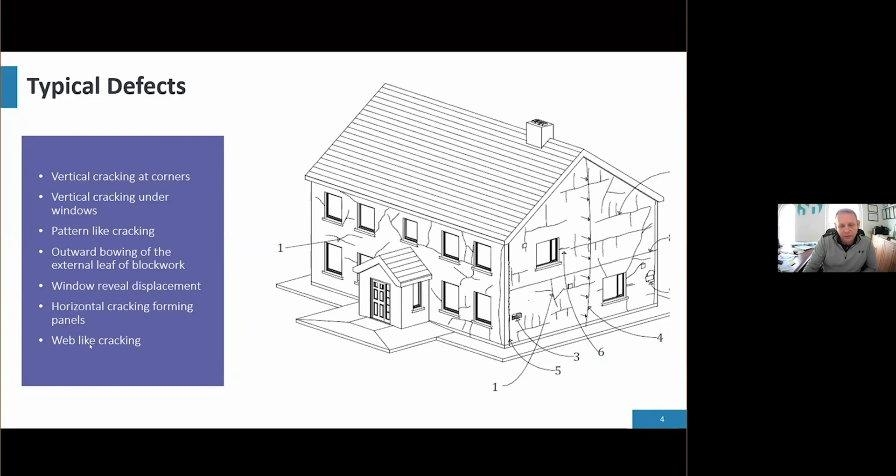Displacement around the window and door reveals - that's another common element of damage. Horizontal cracking forming panels, so we end up with these grids or panels, particularly on gable walls but not necessarily always. And web-like cracking, which is essentially spider's web type cracking.

I've put up a couple of photographs to show samples of things we've seen. These aren't always the worst, and they're not always the most significant. Obviously, the extent of deterioration is only a point in time.

These larger cracks you're looking at here on corners weren't always that wide. There's a progression of cracking throughout time, particularly with more exposure to the elements. So on all three examples, you can see the corner cracking and the movement vertically.

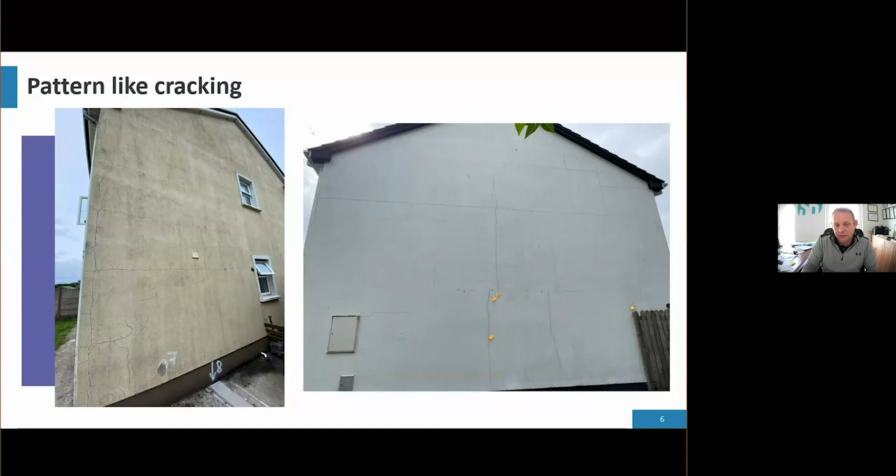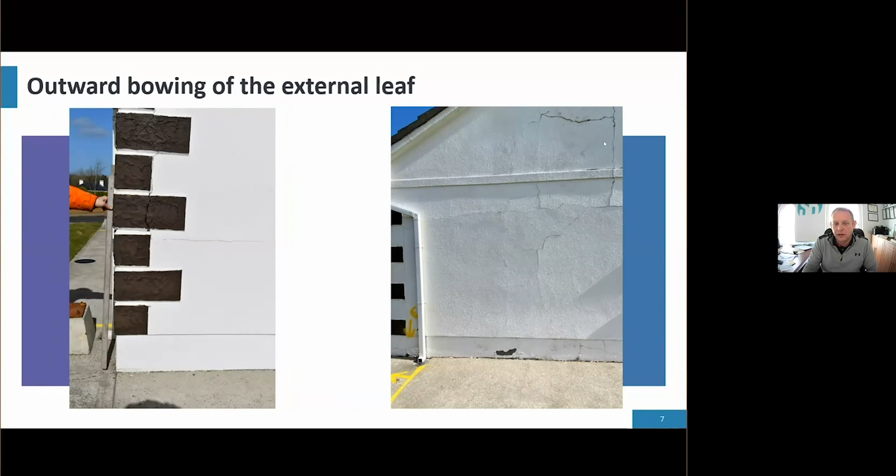The one on the right is more evident from the shadows. You can see the bowing, particularly along this horizontal line here and the vertical line. Again, not all homes will show all of these.

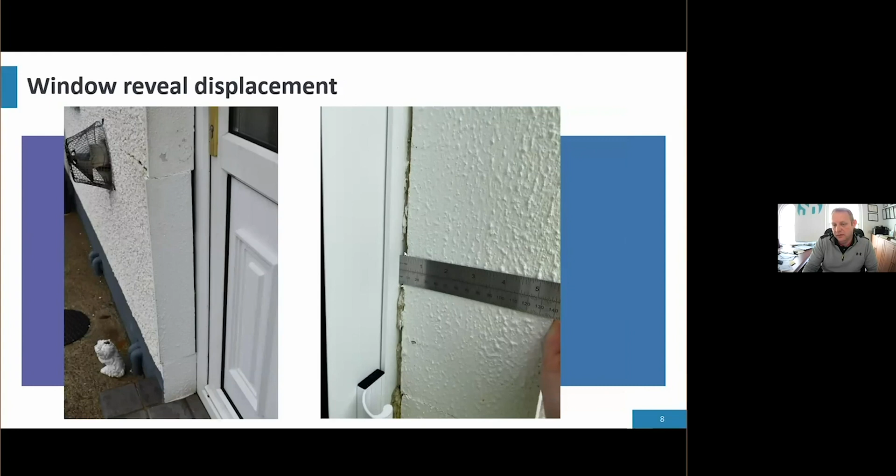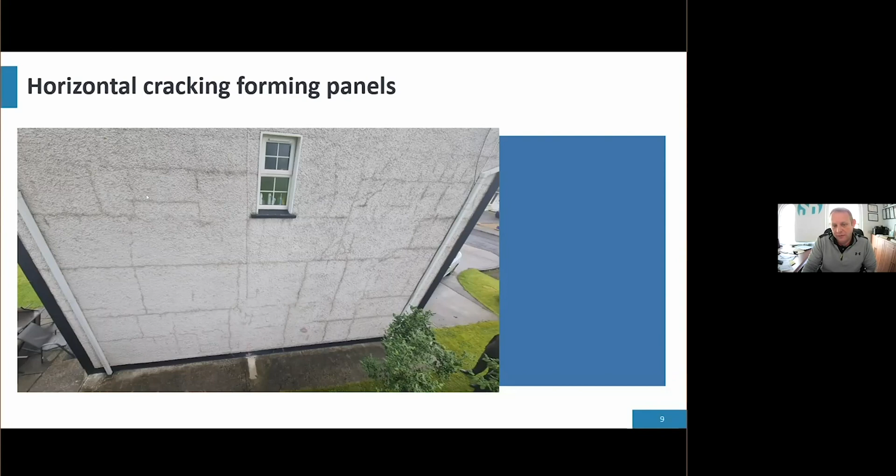These cracks are not marked with anything - this is just rain and moisture lying in the cracks. But I think you'll agree it's quite evident that there's pattern cracking on the gable of that dwelling.

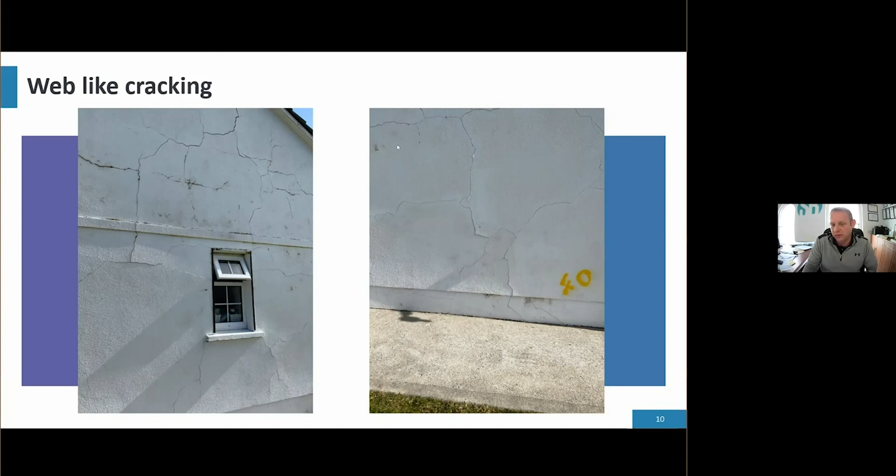Having reviewed a number of houses in Mayo, when we were asked by Martina and members of the Clare Action Group to inspect a few houses in Clare, we did so, and have subsequently done a few more for Clare County Council. I just wanted to show some of the similarities in images, and then we'll talk about similarities in other aspects.

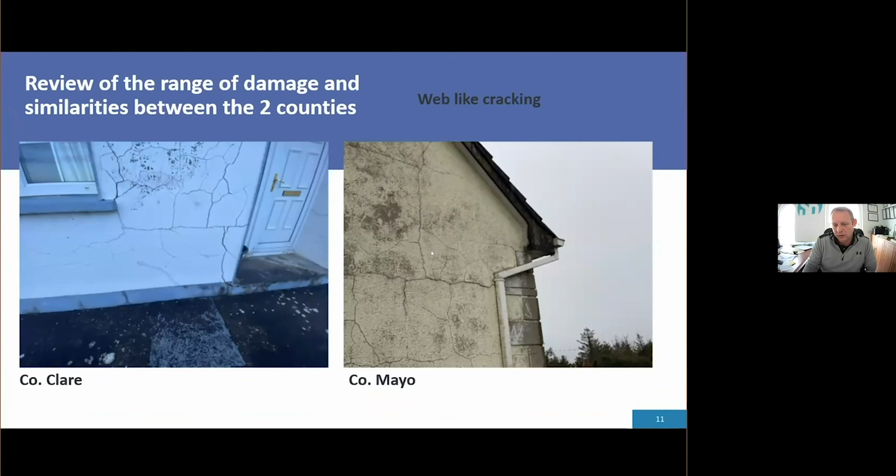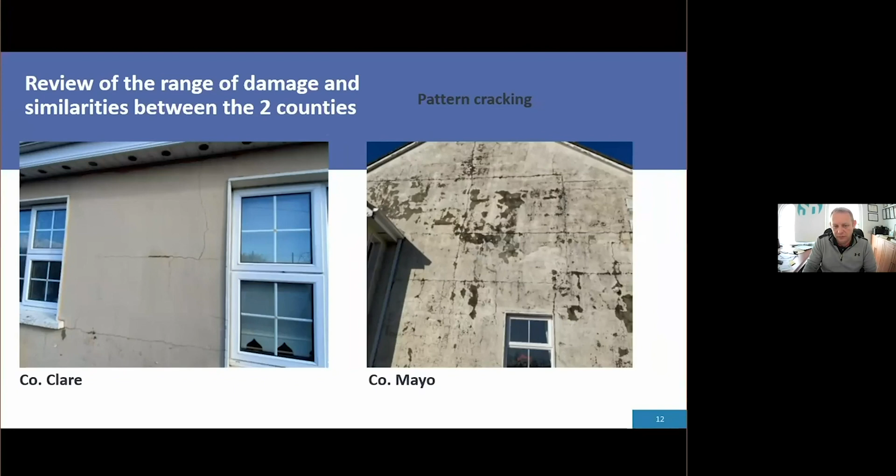Web-like cracking, you can see house in Clare, house in Mayo, very, very similar. Pattern cracking again - it's a very common thread that as damage increases to the property, the cracks become more and more alike. Vertical cracking here on the corners, one in Clare, one in Mayo, particularly bad in this one in Clare.

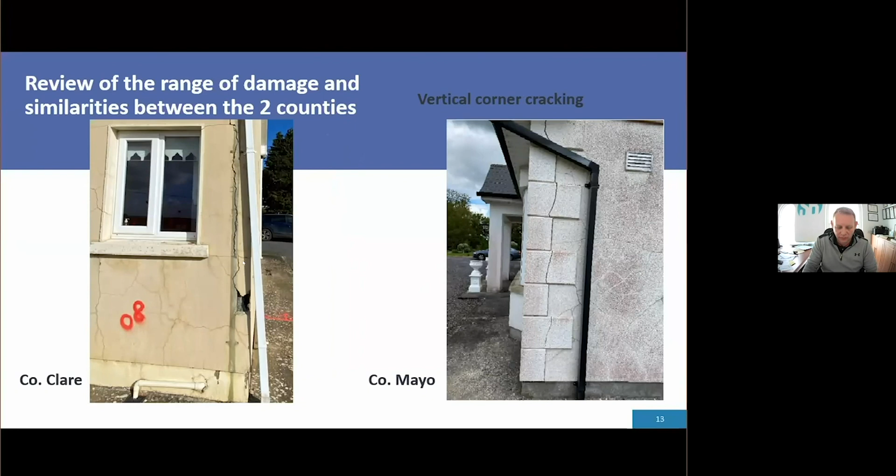Having tested in both counties, with Petrolab's help, I've extracted a couple of paragraphs from reports that came from the laboratories comparing both. One says the samples from County Clare are composed of the same, very similar fossiliferous and potentially pyritiferous black limestone as the samples from County Mayo. We didn't notice any noticeable differences between these samples during preliminary macroscopic observations.

Another paragraph from one of the geologists - I went through all of these reports, and it looks like the material used for concrete in both counties was similar. The aggregate appears to be the same. There were a few reports with additional fine aggregate, for example beach sand, but there was no major difference in reports from both County Mayo and County Clare.

So the physical evidence from both counties is similar, and the geological evidence is similar. The question then arises - why are both not on the defective blockwork scheme? That's what the people of Clare are looking to achieve. The people of Mayo are luckily on that, along with Donegal, although some would have plenty of issues with the scheme in its current form. That's what we've been assisting Clare County Council to achieve.

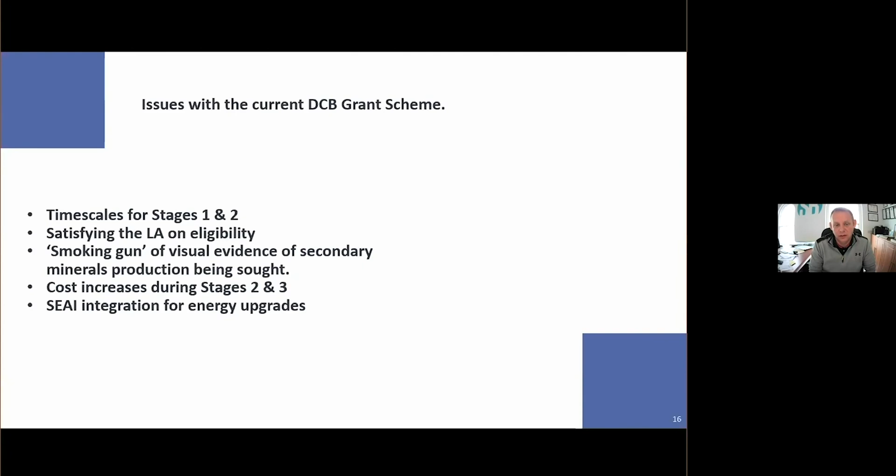We probably have 20 houses nearing completion at the minute that haven't really had any assistance from SEAI, which we would like to see going forward, because I think it's a great opportunity for people to integrate energy upgrades into their dwellings, particularly if it's a complete blockwork removal through demolition.

I suppose the new scheme is a bit speculative at the minute, so I just want to note that. I think the building condition report that will be completed by engineers like myself and Aidan is going to prove difficult, because I could name 10 properties we've been to over the years...

...that were completely externally wrapped with insulation by homeowners trying to hide the cracks they had in their dwelling. So again, it would be difficult to produce a building condition report showing minimum damage thresholds when a photograph of the dwelling will show it in perfect condition.

So I think there's almost a penalty going forward for those who maintain and upgrade their houses better than others. And I think that's going to be an issue going forward.

And the other big issue is partial repair. I sometimes get a little bit of bad press within Mayo County Council, because all he ever recommends is option one, which is demolition.

I mean, demolition to me is the only option for pyrite, and it's not necessarily even demolition - it's removal of the defective concrete blocks, and removal of all of them down to foundation level. And often the simplest way to do that is via demolition.

I know my office will not be certifying any remedial works that don't include removal of all the blocks going forward in relation to pyrite, because I don't feel we're in a position to do so, and I don't feel our insurers will be in a position to do so. That's the stance we're going to take, and we'll see what indemnity the department will provide going forward.

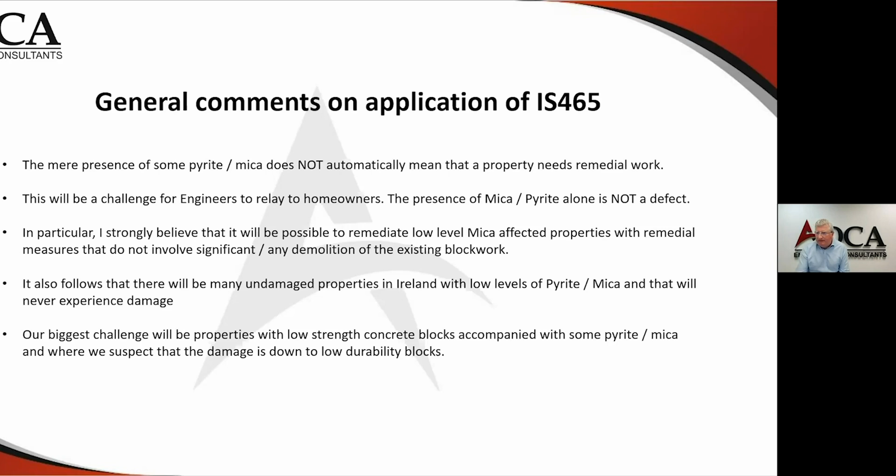Greatest challenges for engineers going forward: the expected approval process looks like a submission to the Pyrite Resolution Board of the Housing Agency. Currently, building condition assessments are sent to the local authority, but they don't have the expertise or resources to review all the cases. In my opinion, this requires a centrally managed hub with input from the local authority as necessary. I understand it will be the housing agency that directs the remedial solution and then requires the homeowner's engineer to adopt that solution as their own.

This is a huge problem, in my opinion, for engineers, and I've reiterated this to Damien Owens of Engineers Ireland and to all parties willing to listen. It's a problem because it removes engineers from their input to an appropriate solution, and yet engineers would then be required to sign off on it.

Engineers cannot get professional indemnity insurance at an economical cost to deal with mica and pyrite works in Ireland under the current regime, and it would be impossible for any of us to get PI insurance for this type of work once the new regime is implemented.

Effectively, what's being said is that the housing agency will direct the engineer as to the solution to be adopted, and thereafter the engineer has to take ownership of that solution as if it were their own, implement it, and then sign off on it as being satisfactory. I'm sure Simon would agree that is not practical or feasible for an engineer.

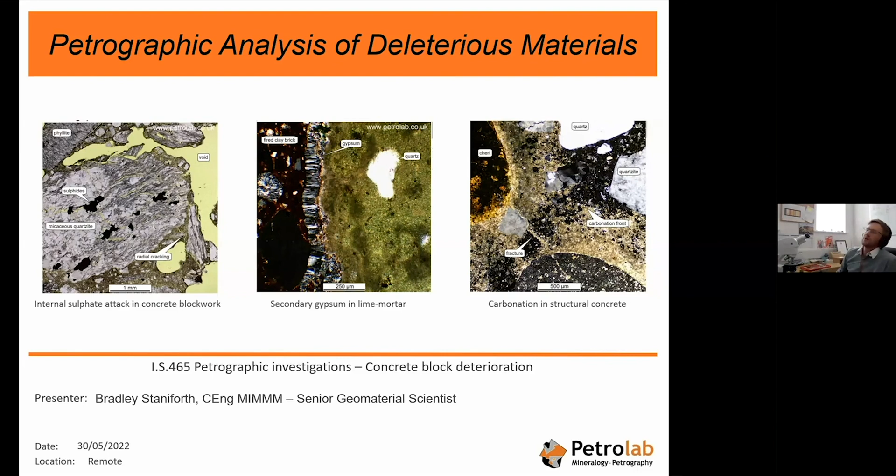So I'm going to present today on the petrographic analysis of deleterious materials, focusing on IS 465 petrographic examinations.

So briefly, what I'm going to cover during this is what is petrography and why is it a key tool to investigating deterioration, and the basic scope and format of the IS 465 testing standard, although that has been covered in pretty reasonable detail by the previous presentations. Then we're going to have a look at the IS 465 testing routes as they are progressed through the testing laboratories.

Look in detail at the test suite A, B, and C analysis we undertake at the laboratories. Have a brief look at the main deleterious components seen commonly in County Donegal and County Mayo blocks, applicable also to the other counties which are being affected by deleterious concrete blocks. And then I will talk through the IS 465 risk classifications, which we provide based on reports. And finally, there's a few limitations I'd like to point out based on the current testing standard and some suggestions for further research, which will help make our assessment of these materials faster and more accurate for the homeowners.

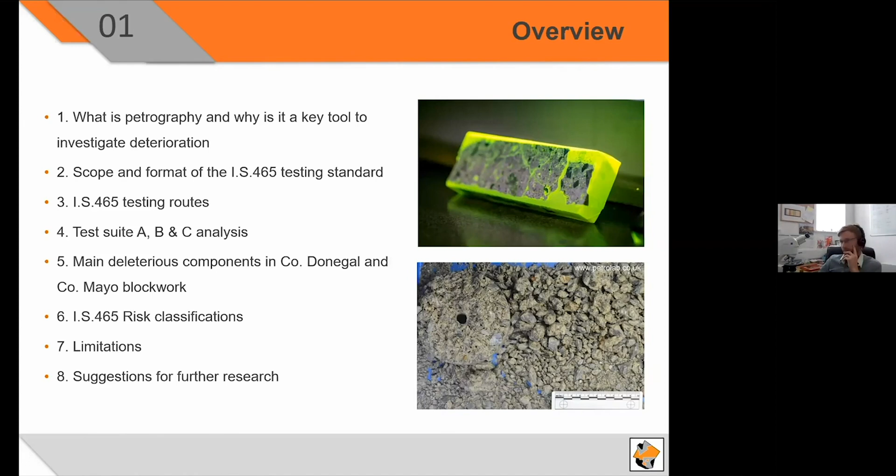Okay, so petrographic examinations involve the microscopic examination of rocks and geomaterials, describing compositions and textural relationships. Petrographic investigations are a well-established geological technique, and they can be applied to concretes and geomaterials to really bring a detailed microscopic view of what's going on in these materials and how that's affecting strength, durability on both a macroscopic and a structural scale. So these investigations are supported by a range of physical and chemical techniques and analysis.

These techniques utilize petrographic thin sections of materials, where the material is first mounted in resin, polished, mounted to glass, and then polished again to 30 microns to be examined under the petrographic microscope, an example of which is on screen currently.

Whilst primarily a microscopic technique, the real art comes in applying this to construction materials and applying those observations up the scale to the macroscopic hand specimen scale, and then using that information to further inform engineers on the structural scale. And that's how we use that to predict their future behavior.

In order for this system of observation to provide effective sound engineering judgment, it needs to utilize good sampling techniques at the macroscopic and structural scale to then pass back down and up again the conclusions in an accurate way.

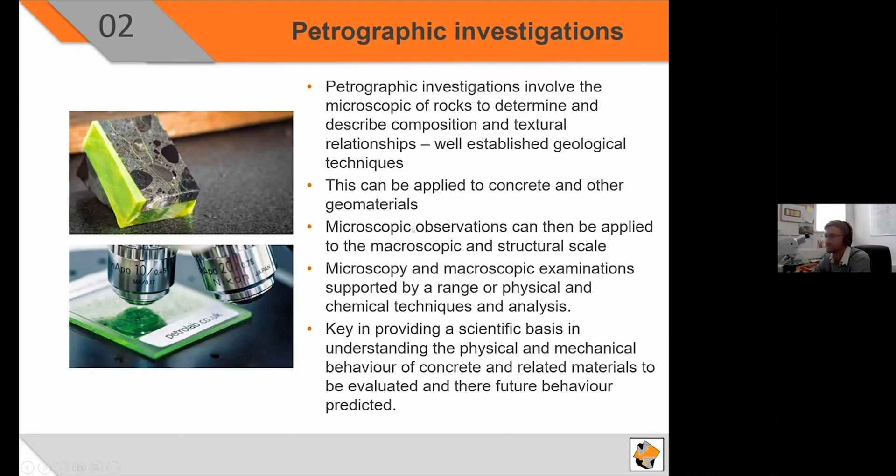Okay, so the IS 465 standard, as we've already noted, was based on the findings of the expert panel. The standard deals with the full examination, both the site and laboratory testing side of things, with the laboratory investigation to be undertaken by a professional geologist.

The examinations begin with a macroscopic examination and then proceed to more detailed examinations based on the interpretation and risk classification provided by the professional geologist and supported by the observations and suggestions of the chartered engineer, registered engineer. The standard provides a framework risk classification for both site, with groups 1 to 4 damage, and laboratory, with negligible to critical risk being assigned.

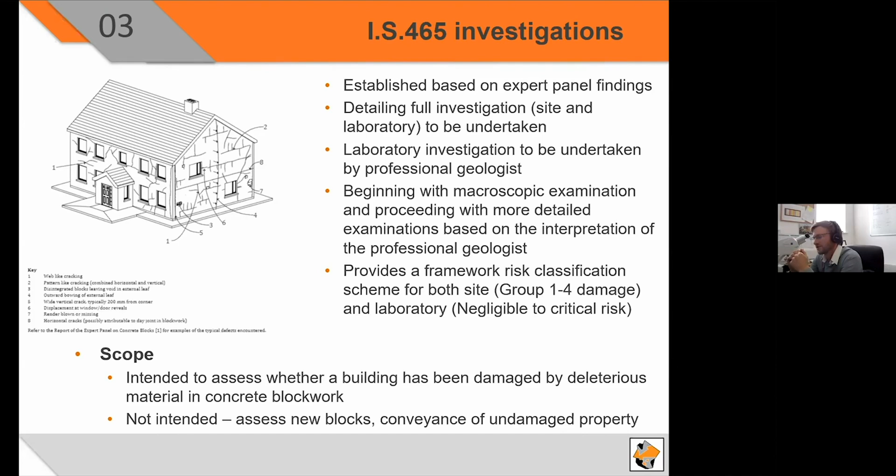A note on the scope of IS 465 is that it is intended for the investigation of properties which have been damaged by deleterious materials. It's not intended for the assessment of new blocks or the conveyancing of undamaged properties, but is being used because there are no standards which cover these applications at current.

The initial place we start with this kind of investigation is test suite A, which is a macroscopic examination of received samples. Once received at our laboratory, samples are analysed by our professional geologists to determine the aggregate types present within the block. If there are multiple aggregate types, concretes can be split into multiple concrete types to make up a representative view of the blockwork present within the dwelling.

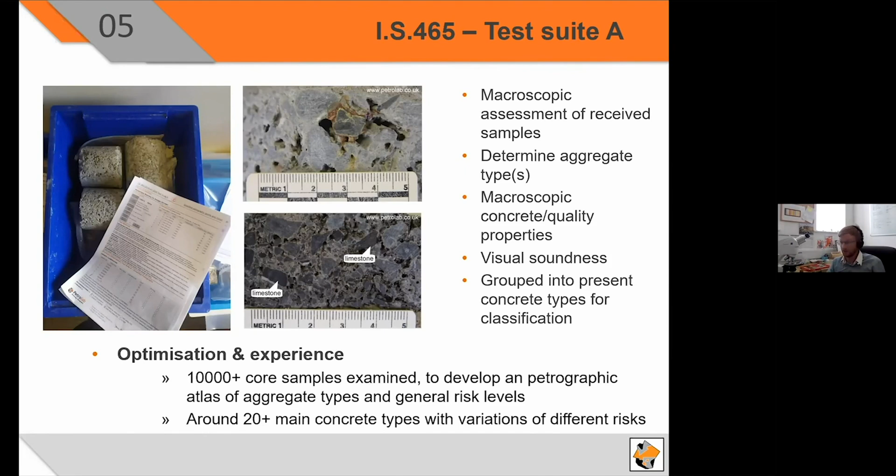So far, Petrolab have examined over 10,000 individual cores and developed an internal atlas of aggregate types and generic risk assessments. Although at current, there are approximately 20 plus main concrete types. Some of these are considerably more common than others, those including the calcareous mudstone lithologies and the pyrite phyllite lithologies. But there are approximately 20 lithologies in general circulation, which we've been seeing throughout these kind of investigations, and occasionally rarer types of which we have not investigated, which we find very difficult to pose risk.

At the conclusion of the test suite A testing, a risk classification is applied. This is based on composition and soundness, and this provides the recommendations for further testing if required. At this stage is where we split into pyrite or mica routes for further testing.

Where multiple concrete types are identified in the dwelling, these may have multiple different risk types, which can make overall classification of a property by the engineer challenging. Additionally, there are certain lithologies where variability is so high that we cannot provide a risk classification at suite A stage. These include lithologies such as slate/metapelites, where high quantities of pyrrhotite can be found in certain beds but not others, or hornfels within the Donegal region, which can either be barren or filled with pyrrhotite.

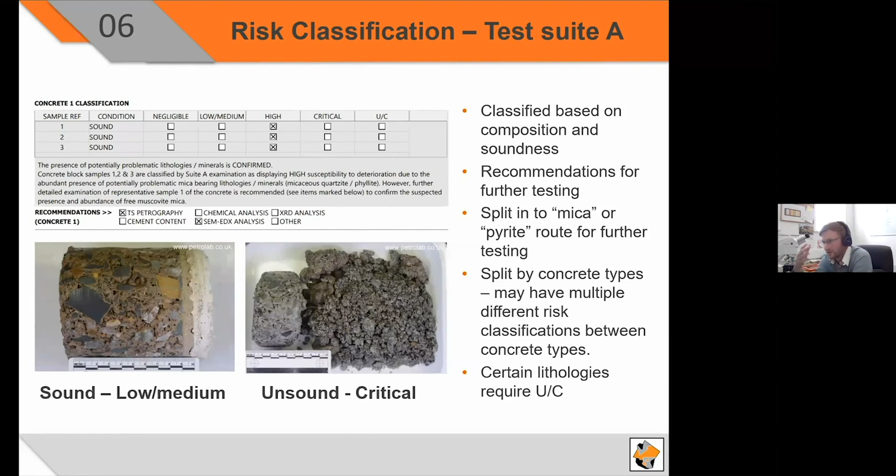From the Suite A stage, after the recommendations are made, these are sent back to the homeowner engineer, and then these will be sent back to us to select for further analysis.

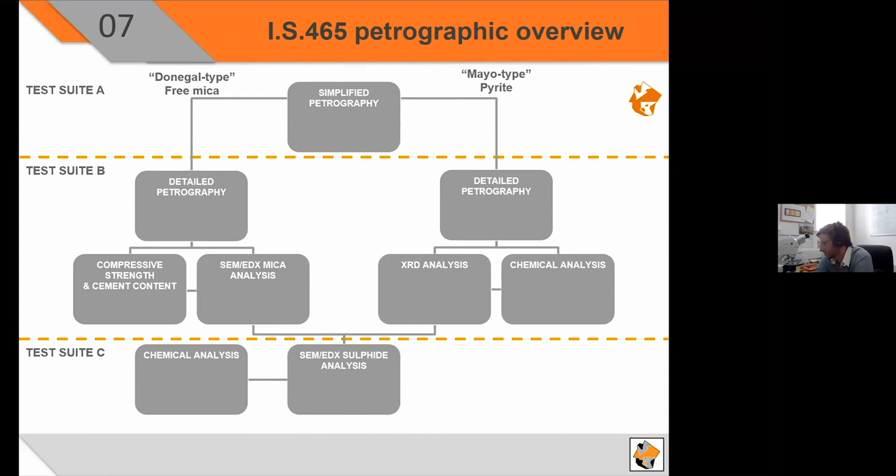Test Suite B involves the microscopic analysis of prepared thin sections. This requires the selection of a representative sample to take forward for detailed analysis. This is selected with the engineer based upon the approach they are taking for the property, whether that be remediation or demolition. We can look at all of the different samples, inner leaf, outer leaf, below, in the case of Donegal free mica investigations, to determine which will provide the best information going forwards.

Detailed classifications of aggregate, binder, and concrete quality are then made by microscopic analysis, including the identification of deleterious components of the concrete blocks. This also helps us look at microscopic factors which will affect durability, such as the condition and the quantity of the binder, the interaction between the binder and the aggregate, and the stability that provides, and voidage, including distribution and secondary mineralization present within the blocks.

Another key factor we've been finding in durability is related to the fine aggregate, where things have a notably great fine aggregate grading all the way down.

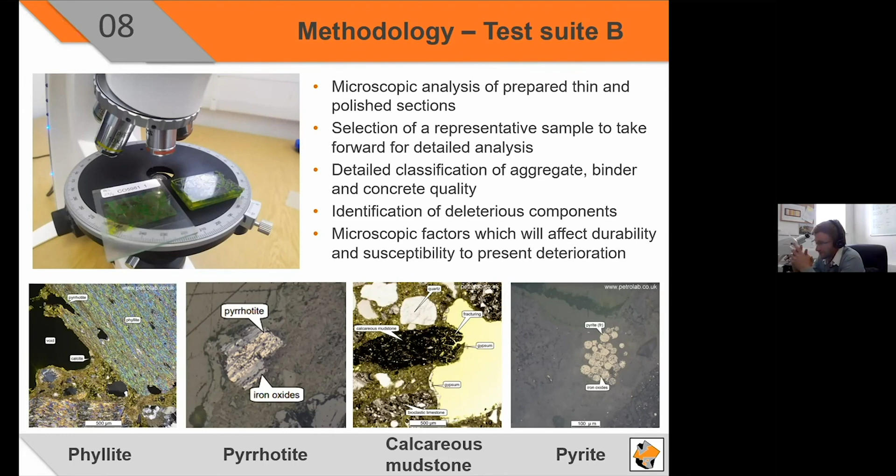So, if we split down to look at the pyrite route, County Mayo type, the main form of deterioration noted in these samples is a form of internal sulfate attack, driven by oxidation of framboidal pyrite clusters concentrated within the argillaceous limestone and calcareous mudstone lithologies.

Oxidation of pyrite leads to the formation of gypsum in situ, which takes up a larger volume, causing fracturing and expansion along the edge of aggregate particles and internally within aggregate particles, forcing the binder apart.

In these samples, we've often found the influence of leaching and deterioration of the highly porous cementitious material can lead to aggressive forms of carbonation and, in severe cases, thaumasite attack, weakening the binder further.

Within County Mayo or pyrite type investigations, the key use of chemical and XRD analysis to quantify sulfides and clays is a key part of the investigation. XRD analysis is used to confirm the presence of sulfide minerals and clays that define the argillaceous limestone and calcareous mudstone lithologies, while the chemical data - specifically the total sulfur, the acid soluble sulfur, and the water soluble sulfur -

are used as a way to quantify the amount of sulfide and sulfate present within the aggregate, which is acting as a deleterious mechanism in this case.

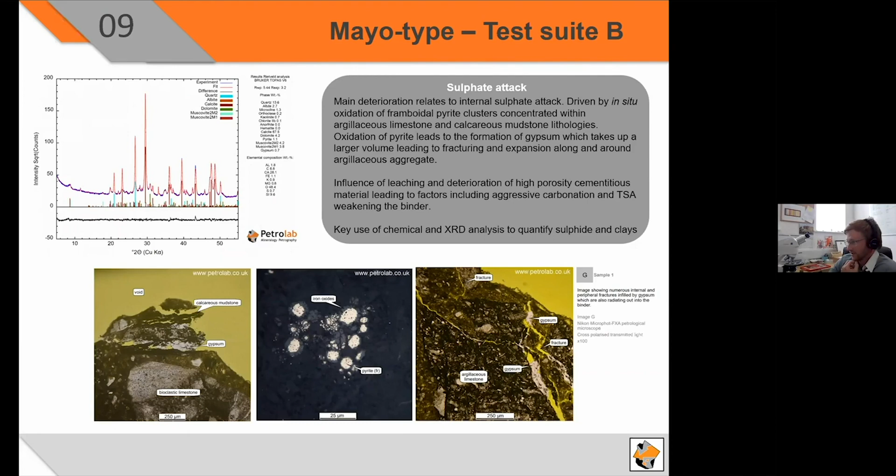If we move over to look at County Donegal type or free mica type, deterioration is largely driven by freeze-thaw action. We have an example here of an internal freeze-thaw test where samples were cycled through freezing and heating cycles, breaking down the aggregate cement bond and leading to sample deterioration in approximately 30 cycles.

The freeze-thaw damage is activated by the distribution of free mica throughout the binder. It's quite highly water absorbent and will take up water and then release it during the freeze-thaw cycles, working to expand the aggregate against the binder, forcing the freeze-thaw damage.

One of the other key mechanisms noted in County Donegal free mica types is another form of internal sulfate attack relating to pyrrhotite. This is not currently covered by the IS 465 standard down the free mica route, but it's something that's been increasingly noted as a cause of critical samples within the Donegal area.

In this case, like in the pyrite examples, internal sulfate attack instigates, leading to the formation of gypsum, forcing aggregate particles apart, with pyrrhotite being considerably more susceptible to oxidation than pyrite.

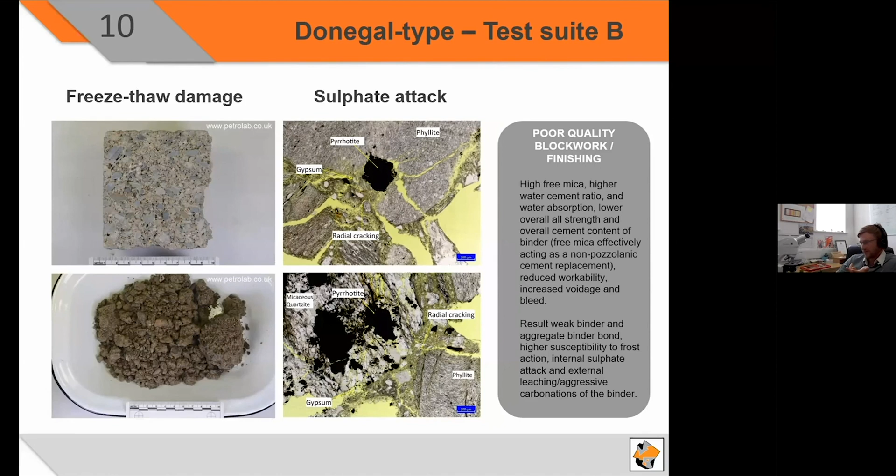If we look at test suite C, this focuses on analysis by SEM. On the left-hand side, we have free mica analysis.

This is undertaken by elemental mapping of the binder, with the geologist then using image analysis to interpret and remove things which influence this figure. That includes other fine minerals such as feldspars, which can distort the free mica reading, as well as free mica which is over 63 microns in size.

Anything over 63 microns is suggested to be non-deleterious, as mica is a commonly observed mineral throughout these stratas. But it's really the fine mica that's below 63 microns which has a major impact on the performance of concrete in this application.

On the right-hand side, we have SEM analysis to confirm pyrrhotite, which is equally applicable to County Mayo and County Clare type analysis, where it can be used to provide detailed confirmations of in situ oxidation.

One of the challenges that relates to this kind of analysis is the detailed interpretation required by the geologist in this context, and the large cost and time implications of running full detailed SEM analysis on routine testing samples.

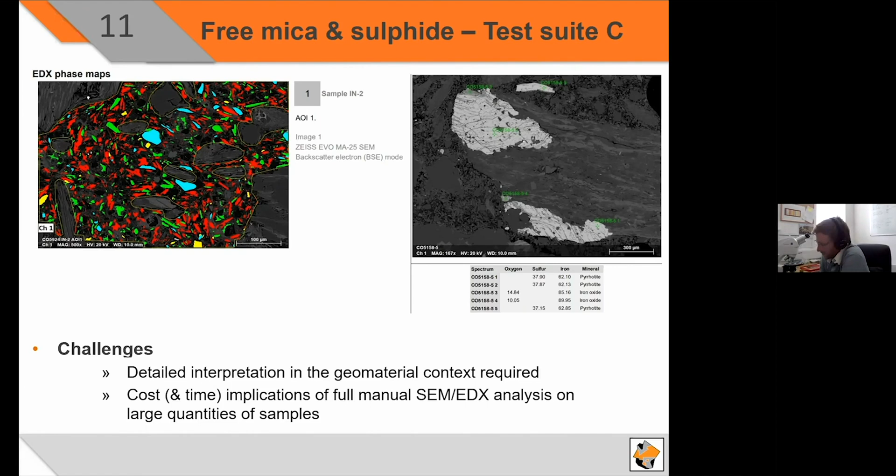So once the test suites have been completed down either route, it ends with a risk classification being provided by the professional geologist relating to that set of samples.

On the left-hand side, we have the risk factor assessment for mica degradation as specified by the IS 465 standard, including visual evidence, free mica percentage, evidence of moisture ingress, microcracking, degradation of the matrix, and microporosity.

On the right-hand side, we have the risk factor assessment for sulfide degradation, which additionally includes the presence of problematic lithologies such as mudstone, as defined by SR16, the presence of gypsum and secondary sulfates, and reactive sulfides in the binder.

So if we take a look at the free mica side first, the risk assessment for mica deterioration - the top number of visual evidence of deterioration typically corresponds to the classification the material is given down the bottom. This runs from negligible risk to low, medium to high risk, onwards to critical risk if the samples are deemed unsound.

The main factors that affect this are free mica, which typically provides a large classification in this kind of testing, particularly driving high numbers, with the negligible category effectively coming in beneath 1%, making it very difficult to give any negligible classification within County Donegal.

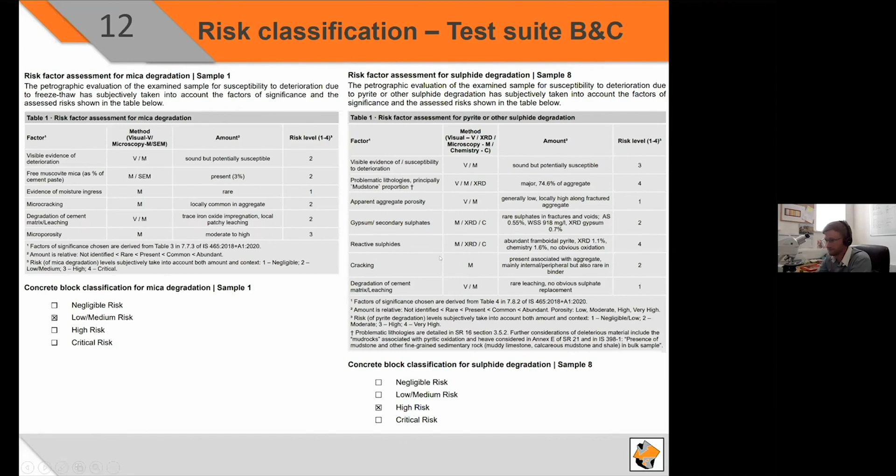There are several limitations levied upon us based on the current standard and our interpretations of the risk classifications. Examination and classification are based upon the received samples.

Unfortunately, there is currently an inherent sampling bias, especially noted within Donegal County, where samples must be taken approximately 200 millimeters away from cracks, with a high sampling bias towards areas which will give good samples for compressive strength.

This is effectively masking some kinds of deterioration that we feel we are not seeing in the samples when related to the structural observations provided by the engineers.

The Suite BC classification is provided, as noted by Simon Beale earlier, on a very small area of material examined from the whole property.

Making this representative can be challenging, and the engineers and ourselves work together to try and make this as representative as possible, to provide a classification which is representative of that concrete type within the house.

Variably effective ancillary testing from a petrographic point of view - these are asked to be considered by the IS 465 standard. However, they have a variable effect on what we will report, and they're sometimes contradictory to the primary observations.

In these cases, we always prefer the primary observations of deterioration that we are seeing. We'll be providing this evidence forward for risk assessment analysis.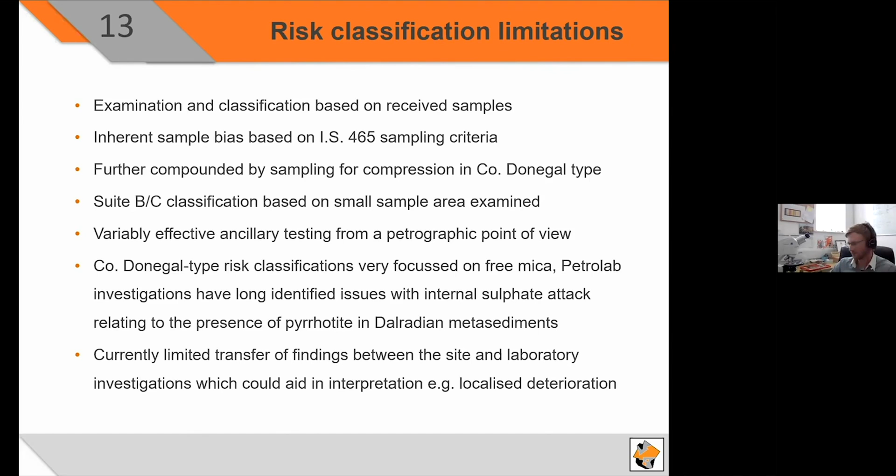That is, specific localized investigations of deterioration, which could give us better indications of how this material is faring in situ.

Finally, I have a few observations based on further research required in this area. The first is looking further at pyrrhotite oxidation within concrete. As noted, pyrrhotite is commonly observed within phyllitic lithologies common to County Donegal. This is sometimes observed to be oxidized and causing issues, where other times free mica and frost damage are the main issues. However, we have seen a large correlation with the number of critical samples from Donegal affected by internal sulfate attack for this reason. The reactions related to internal sulfate attack of pyrrhotite still require additional research and classification for inclusion within the IS 465 standard.

Another factor is the influence of external factors, such as groundwater conditions and sulfate attack within foundations. While this is not thought to be a very significant feature, the influence of external sulfate attack on lithologies which already contain high sulfide and high sulfates cannot be ignored. This kind of information doesn't currently seem to be recorded, and could feed back to us being able to provide firmer and better investigations of deterioration, particularly within foundations.

As noted by Aidan, one of the other key areas of research needs to be a correlation between the finishing systems utilised and deterioration. There is a large amount of properties being investigated in all counties; however, the likelihood is that these blocks are present in considerably more homes. It may well be that in homes where finishing systems and indeed work were finished to a higher standard, this is preventing these blocks from entering deleterious stages. Research into homes that have not been affected by deterioration as much could help us further this area of knowledge.

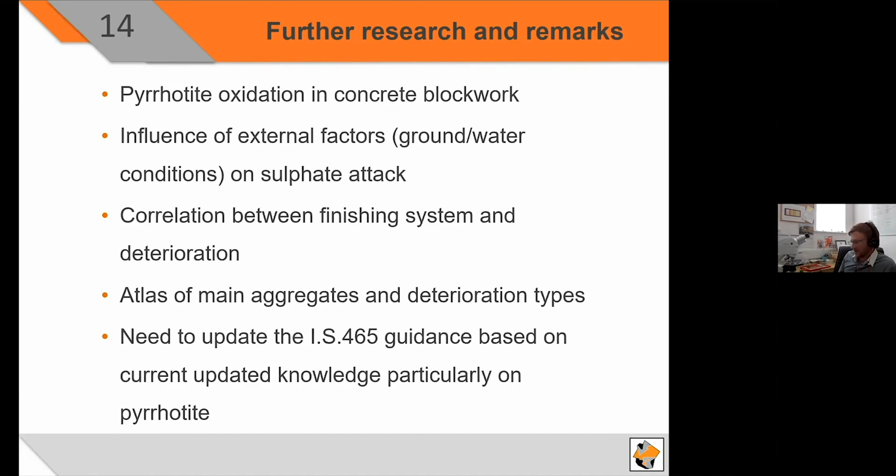Thank you very much for listening.

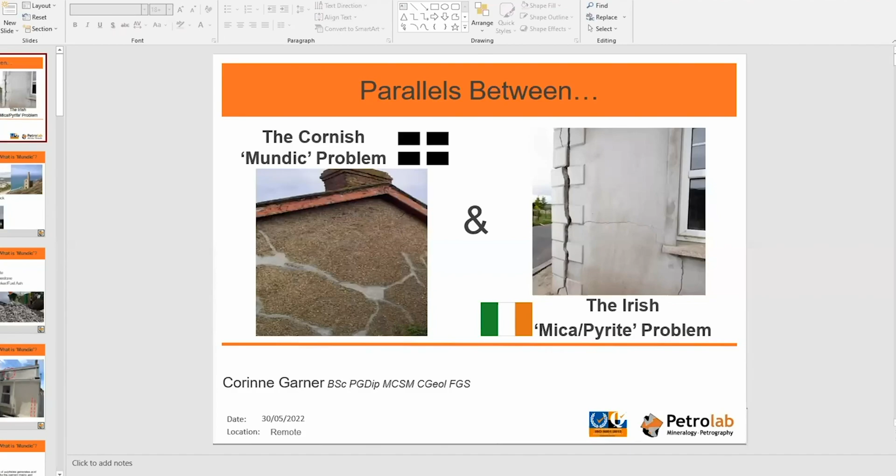Okay, can you all hear me okay? Yep. Okay, how's that looking? Yep, it's good. Good, Corinne. Great, okay, I'm going to have to try and fly through this one, otherwise I'm going to eat into the next session.

There's been some extremely interesting and devastating presentations from you all this morning, and seeing the volume of samples that we personally receive at Petrolab, our hearts really do go out to you. We've obviously experienced a similar problem down here that we've been dealing with for the last 30-40 years, and that's what I'm going to be talking about today. My name is Corinne Garner. I'm a chartered geologist and senior mineralogist here at Petrolab, and I've been involved with both the Cornish Mundic and the IS 465 problem. My presentation will be on drawing some parallels between the two.

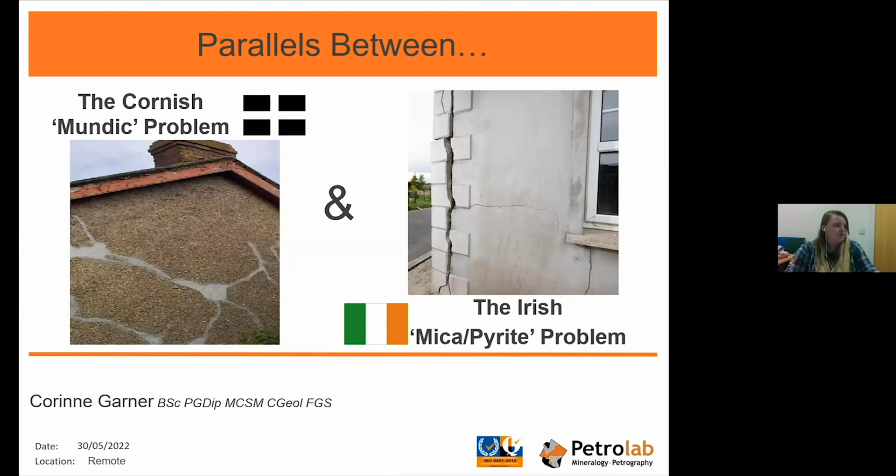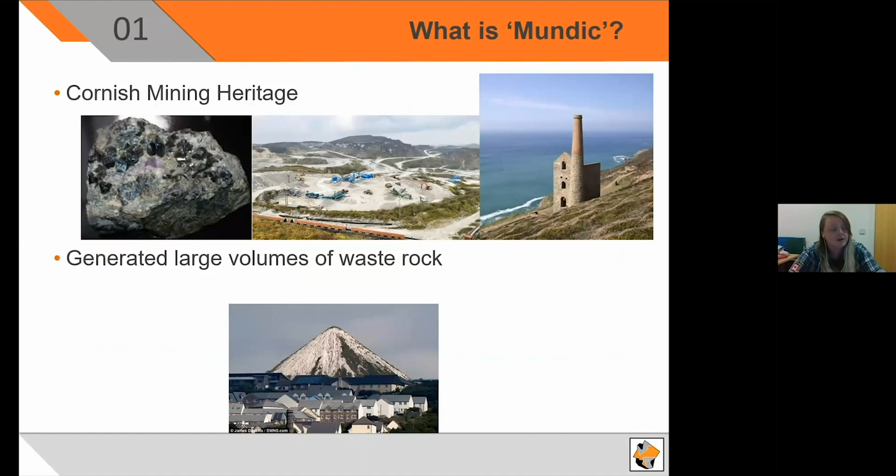We've obviously got a rich mining heritage down here for commodities like tin, lead, copper, china clay, and more recently lithium. The mining of these commodities has produced vast amounts of waste rock - there's one of our pyramids there. To make use of a lot of these waste heaps, some were deemed fit for use as aggregate in concrete. Types of aggregate we have include granites, dolerites, slates, and a lot of beach gravels. But our number one aggregate is the china clay waste, which is accumulated through the extraction of kaolin from weathered granites, which we obviously have a lot of down here.

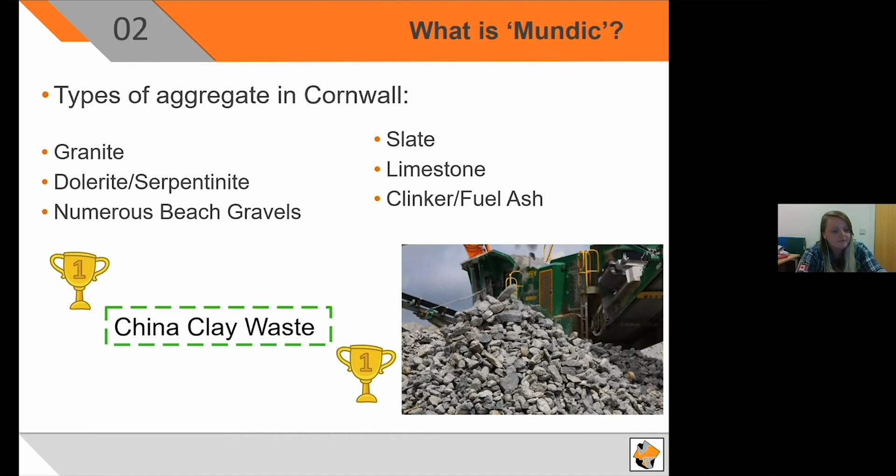However, metallurgical processing waste was deemed fit for use from the 1900s through to the mid-60s. Our most common types include mineralized granite, pelitic hornfels, lead-bearing mudstones, and a lot of incinerator waste.

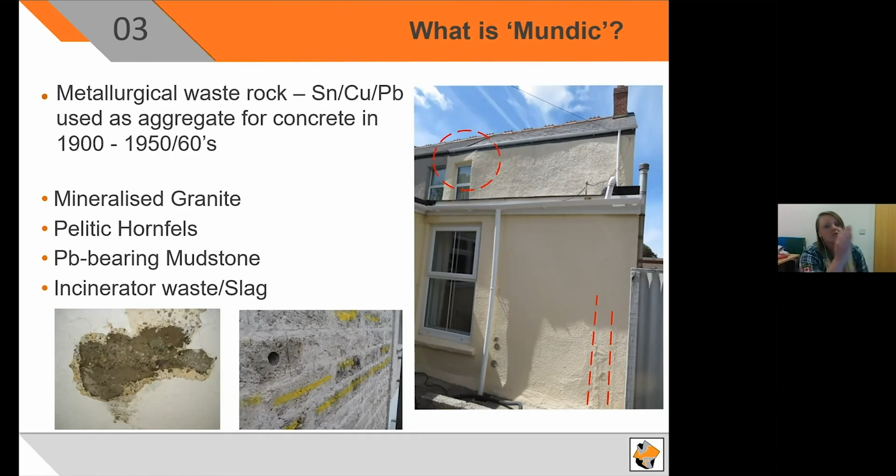You can see a couple of photos there. The one on the left is the sort of rotten concrete block that Martina was describing this morning. The middle is a typical site visit, which looks kind of like Mundic block roulette - some of the blocks have it, some don't, you have to go around with a spray can. The one on the right is a site visit I did the other week - the two parallel lines pattern cracking, where the gable elevation is detaching from the house, and at the top the window is bulging at the roof space from expansion. So, a very similar problem.

So what is Mundic? Mundic actually translates to pyrite. It's a Cornish term, so it's theoretically the Cornish pyrite problem. The mechanism is the breakdown of sulfides, which generates acids attacking the cement. This breaks down the cement matrix, usually at the cavity first, outwards, and then you end up with complete loss of structural integrity.

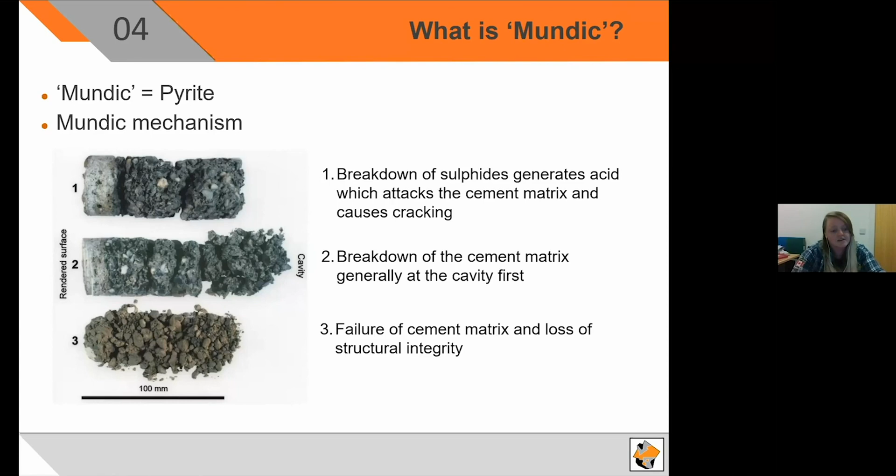So Mundic testing was determined by the RICS guidance, which was set up to give a clear classification scheme of pass and fail for mortgage lenders to use so they can determine mortgage security. Mundic testing is required on all properties here that were built before 1960.

Typical test regime includes cores extracted by a chartered surveyor. We do a visual macroscopic examination of 50mm drill cores. We identify the concrete types, deleterious aggregate, and any stable aggregate found at this stage is given an A1 classification, and any deleterious aggregate remains unclassified and is recommended for further testing. The only thing is, the debris you can see there is clearly unsound condition, and it's referred to as Class C condition.

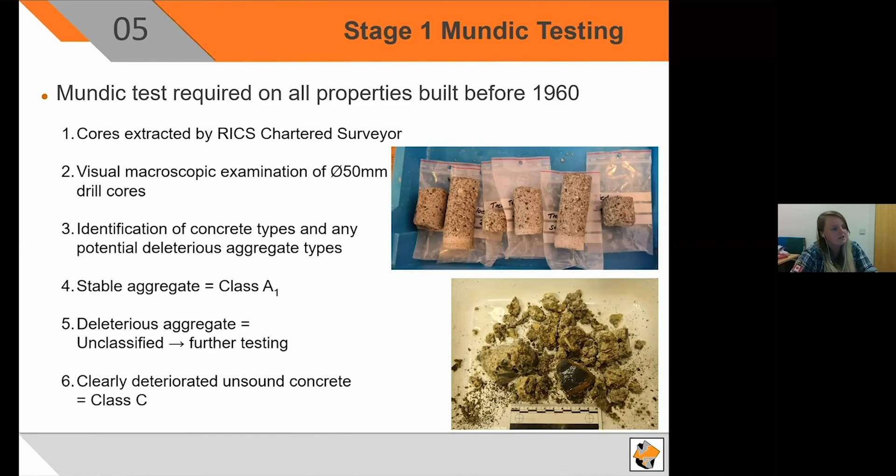So here I've got some comparisons between the stage 1 and the suite A testing. I know we have long turnaround times, which frustrates both the homeowners and the engineers, and I'm hoping this might help you understand why. Our typical turnaround time for Mundic testing is about 24 hours, versus the suite A testing, which typically takes about 10 days.

Some typical things we have: we don't accept a chain of custody for Mundic, it's not required, whereas for suite A's, we have to take the chain of custody, sign them, stamp them, scan them, and send them back to the engineers. I think the biggest problem we have is working with 100mm diameter drill cores versus just the little 50mm drill cores that we use for the stage 1.

So for stage 1 test, the samples come in, they're logged in, we don't take photos of them, and we just make the estimation and visual assessment. Whereas for the suite A testing, the cores are logged in, then we take a photo of every single core we receive, then they're washed, then they're cut for suite A, the core comes back, it's then photographed again, and a high magnification image is taken.

It's a big process. The handling of bulky 100mm drill cores is actually backbreaking work when you have so many. We have a quota to meet, which is usually about 20 houses per week. So at 8 cores a test, that's about 160 per week. It all adds up, and then you get these lengthy turnaround times when we get backed up. So maybe, is it necessary to have 100mm diameter cores if they're not suitable for CST? That's something to maybe think about.

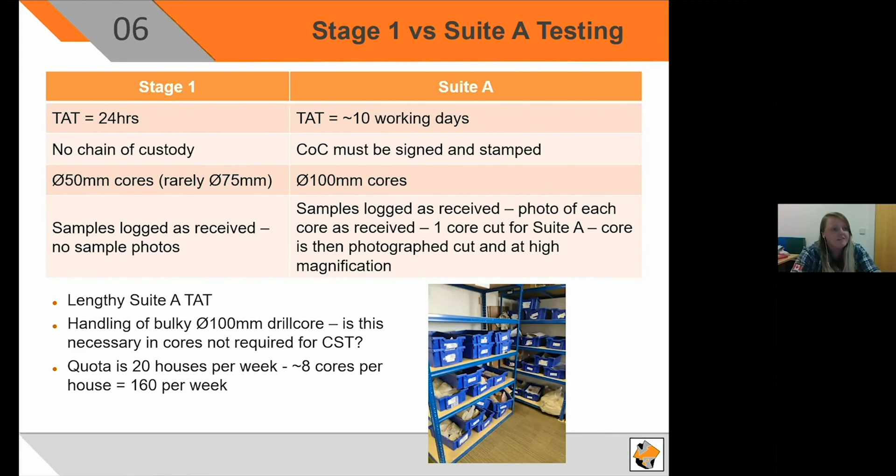So for further testing after stage 1, you then go on to stage 2, which is essentially the suite B process, just on a smaller scale. We do petrographic analysis on a representative sample, and as deemed by the RICS guideline, we have a 30% deleterious aggregate cutoff. So anything less than 30% is deemed good aggregate, and greater than 30% is deemed bad aggregate.

To put it into perspective, the worst aggregate we see is lead mining waste - 99% of the time it does have greater than 30% deleterious aggregate, and is therefore Class B as standard. We've also got pelitic mining waste, which needs a bit more assessment of modal analysis and point counting. We've got complex sulfide waste, which is based on percentage of sulfides rather than pelite aggregate.

But at this stage, from stage 2, if you have less than 30% deleterious aggregate, it is assigned Class A2, meaning it's fit for mortgageable purposes. However, anything greater than 30% deleterious aggregate is assigned Class B, and then becomes unmortgageable. It does have potential for stage 3 expansion testing, however this actually takes a year for the testing. This is why you see a lot of houses down here that are cash buyers only, because they are not fit for mortgage purposes.

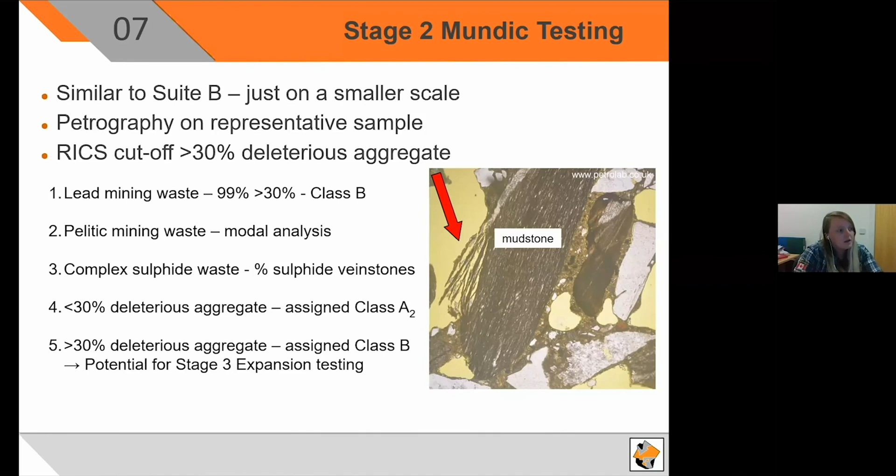So to start with, let's look at the Irish pyrite problem quickly. The mechanisms for that, in basic terms: framboidal pyrite generates sulfates. Sulfates form along internal cracks. As you can see, there's a couple of pictures here with nice white sulfates forming there, and this causes expansion and leads to loss of structural integrity, hence the debris in number 3.

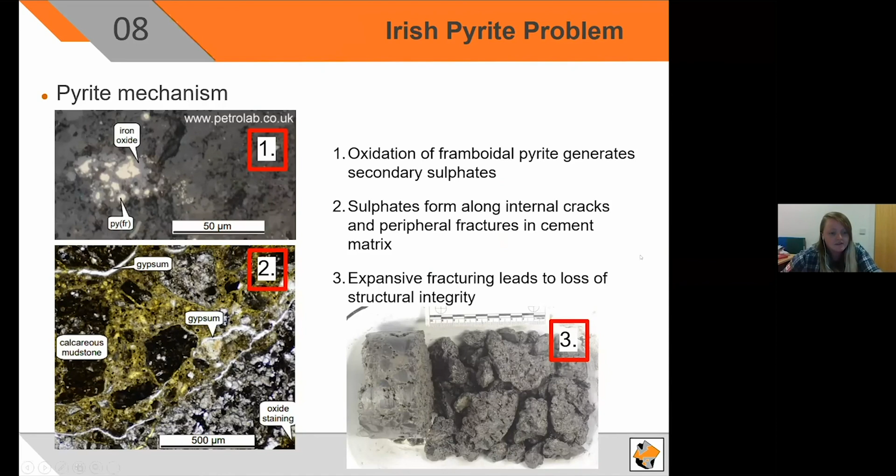This problem is actually extremely similar to our Cornish Mundic pyrite problem. This is our typical lead waste, exactly the same premise. The lead waste is mudstones which bear framboidal pyrite. You have oxidation of the framboidal pyrite, which generates secondary sulfates. You can see all these internal cracks opening up near the arrows, spalling into voids. You've also got a sulfide here that's blowing apart, and again, leads to expansive fracturing and loss of structural integrity.

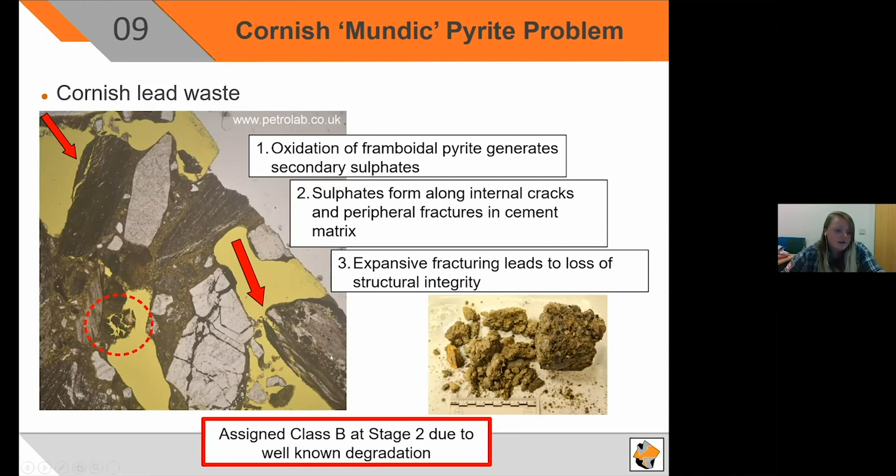So from this, at stage 2, it is automatically assigned a class B because it's due to well-known accelerated degradation. So next, the Cornish waste we have, which has a higher variation and is usually based on pelitic hornfels.

This is a picture of pelite in the top right corner there. You can already see the brown oxidation halos starting to form. And then at the bottom two, you've got some higher sulfide mining waste with chalcopyrite, arsenopyrite, and these are actually from foundation blocks.

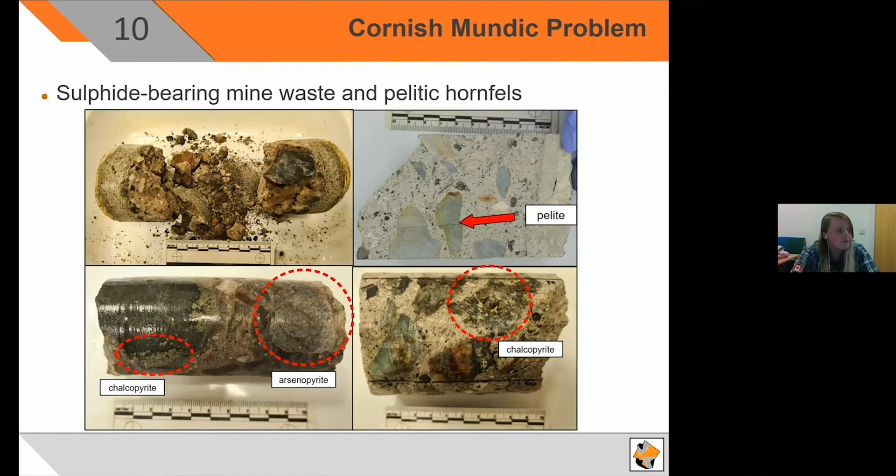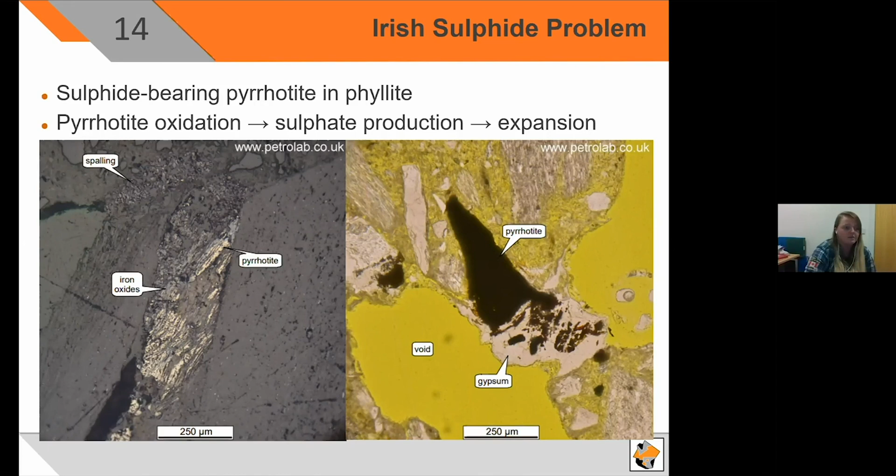On the right, in transmitted light, you have a pyrrhotite fragment producing the white sulfate that's very common in the Mayo limestones, but it's not typical only to Mayo—it is everywhere in reacted sulfides. So this is a typical gypsum spalling into a void and expansion of the sulfides in the Donegal blocks as well.

So another thing to think about is the nature of the phyllite and other micaceous aggregates. There are numerous fractures, as you can see. You've got lamination parallel fractures here, and you've got the big freeze-thaw fractures throughout the binder.

Some might say that this causes pathways in the binder for the sulfates to easily migrate. Is that possibly another reason for accelerated oxidation? And really, is this actually more of an Irish mica and sulfide problem?

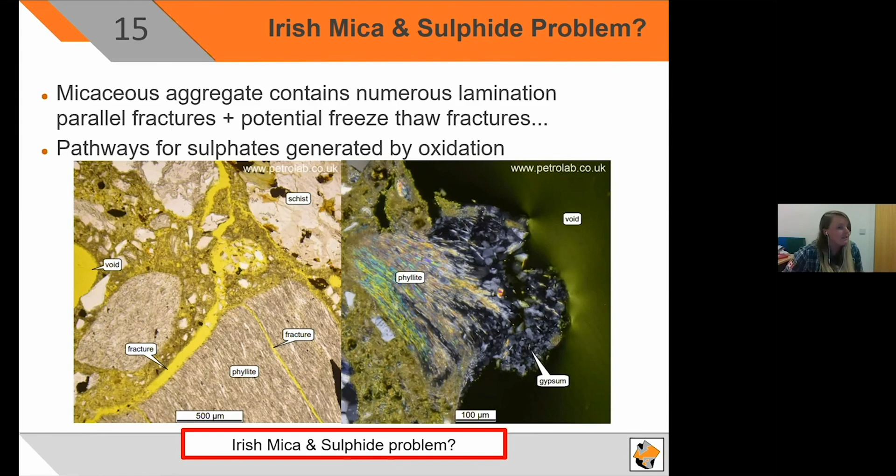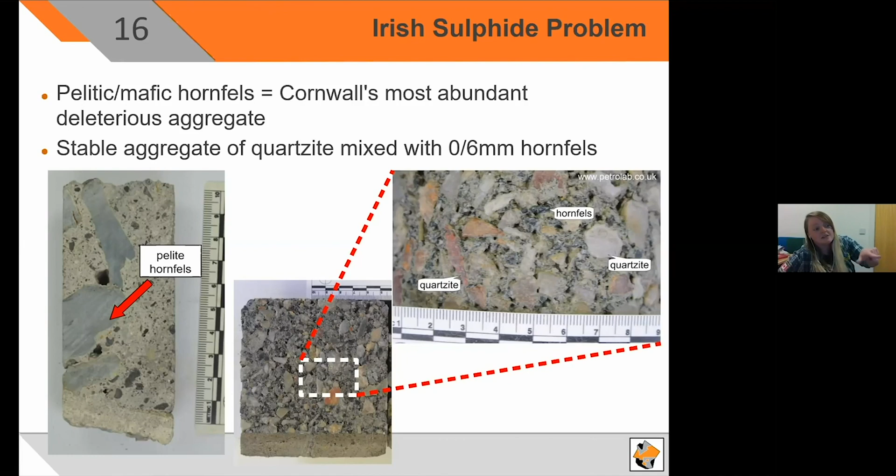Another slightly unusual aggregate for us, but you can still draw parallels from it. This is a typical pelite from Cornwall on the left. However, on the right, this is a usually stable red and white quartzite aggregate with no mica, but it has been mixed with a fine-grained 0 to 6 mil hornfels, which is Cornwall's most abundant deleterious aggregate. So theoretically, from our RICS guidelines, that equates to less than 30% of the deleterious aggregate, which would be stable.

However, these are some of the conditions of the samples received, so you have ranging from intact and nice cores to literal debris.

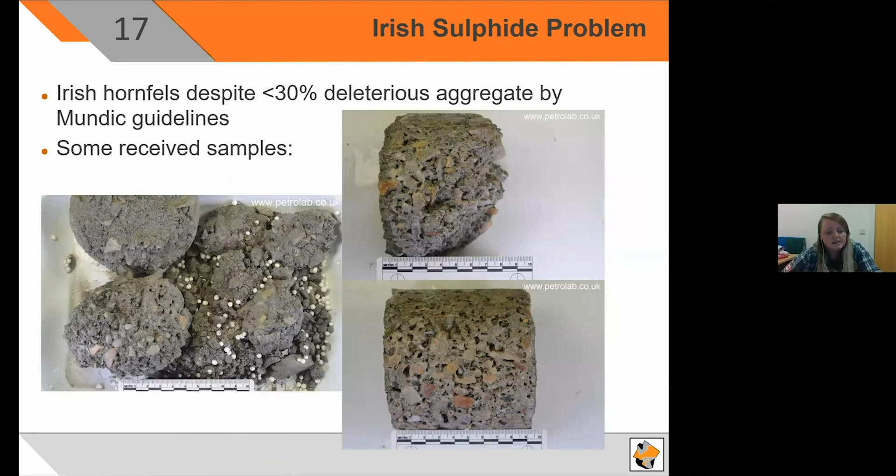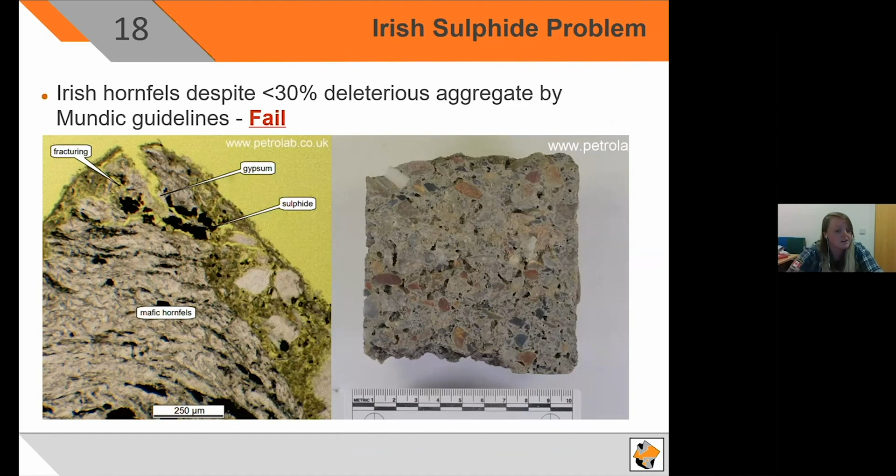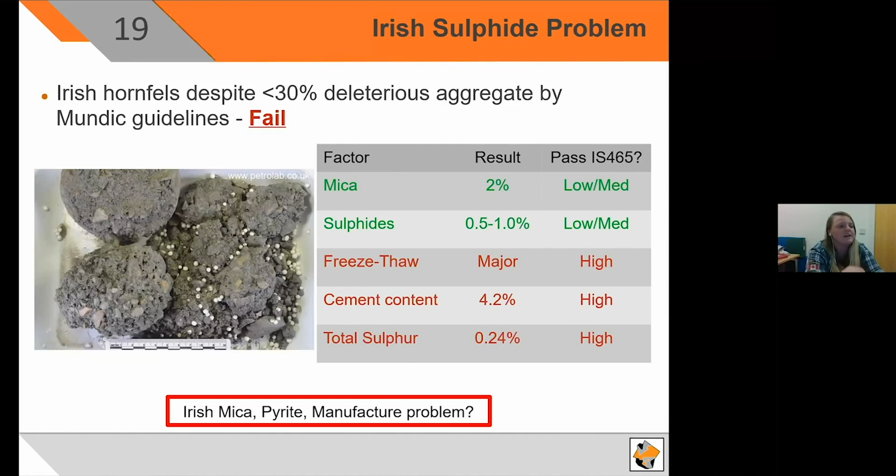It's not as bad as some of the greater than 1% to 2% aggregates, so it would technically give a low medium. However, the total sulfur is 0.24, very high. It's another contradiction. And the cement content is abysmal at 4.2%, the binder is basically non-existent.

So what's actually to blame here? There's low mica from quartzite and pelite. There's less than 30% of deleterious aggregate, which by our RICS guidelines would pass. So is it the mica? Is it the sulfides? Is it high fluid flow? Is it low cement content? So is it an Irish mica, pyrite, or manufacture problem?

Really, this is hammering home the idea that further research is definitely required into some of these variable aggregate types.

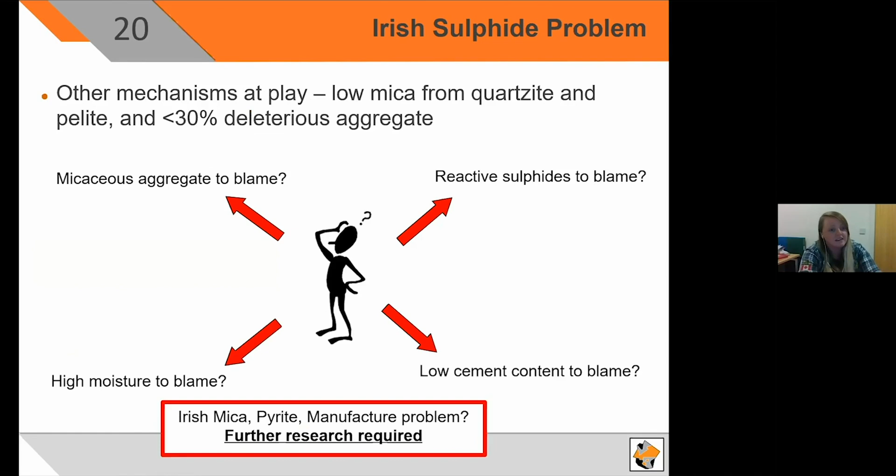Let's go to the Donegal phyllites. So we've got the Irish mica problem, which is usually caused, as we know, by metamorphosed micaceous rock. Typically this is when the aggregates are used in concrete, and abrasion of these causes them to pulverize and fray like confetti into the binder and become widely distributed. That's the main cause for concern here.

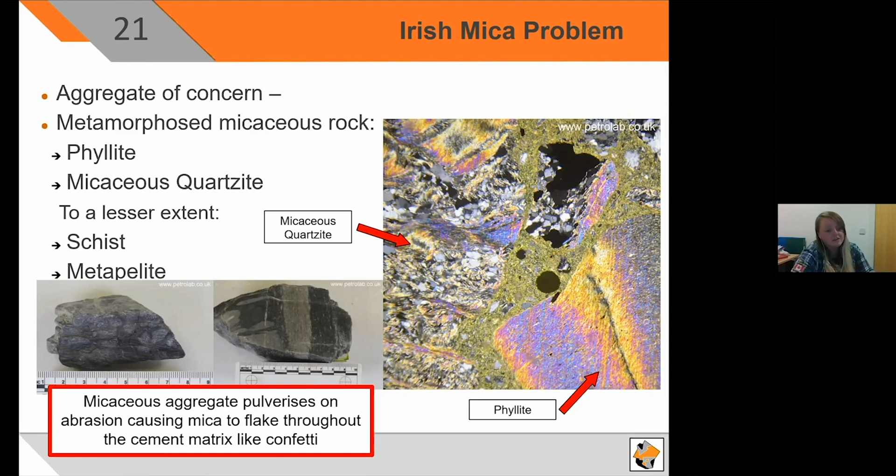One thing you'd like to draw your attention to is free mica is anything less than 63 microns, and is known to increase water demand and induce fracturing. The best way to see it sometimes is in fluorescent light, so that's the one on the left. You can just see the little black flecks all over the binder, which are frayed everywhere.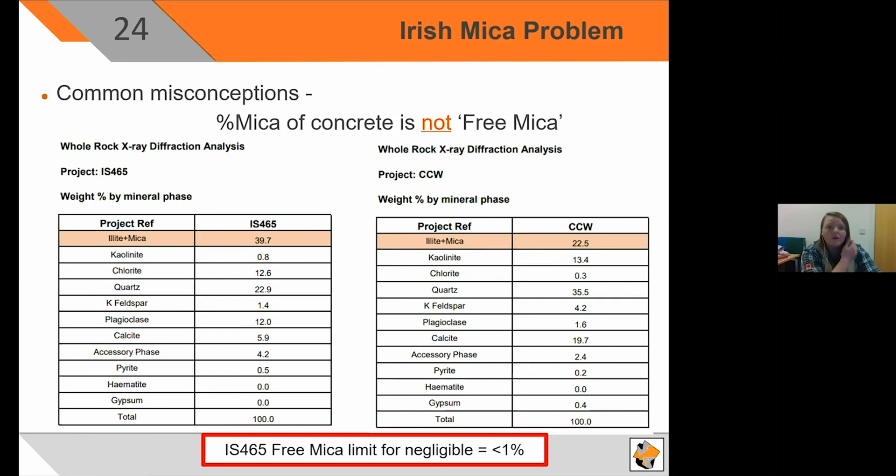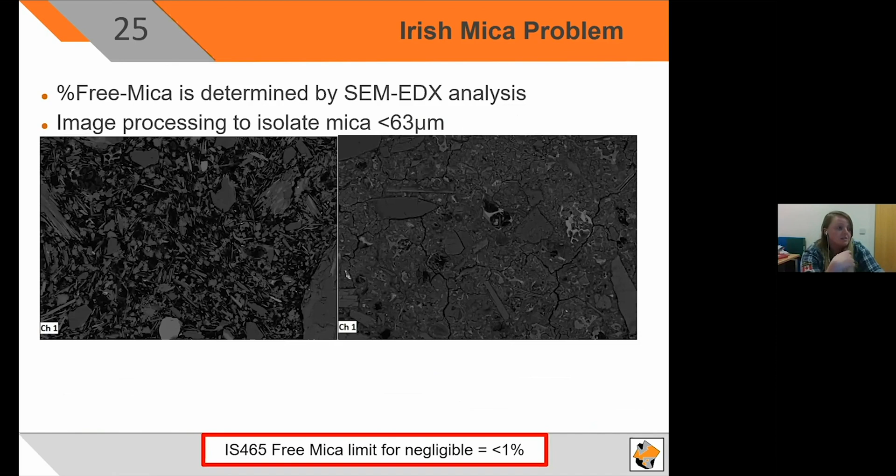The one on the right, which is the China clay waste with the visible mica, there is no mica that is less than 63 microns - there's barely any. So that's less than 1% and would be given a negligible classification at IS 465.

Another thing we'd like to say is this is a summary table to conclude the differences between the RICS classification and the IS 465 standard. I think the main take-home message here is the purpose of the document. The Mundic RICS standard was designed for mortgage lenders to determine a clear pass and fail criteria for mortgage security, whereas the IS 465 is strictly written as a grant scheme eligibility.

If the property is not deemed eligible for the grant scheme, then what does the classification actually mean? It was not designed for conveyance, however it is being widely used for conveyance. And IS 465 is extremely hard to achieve a negligible classification, whereas if you look at some of the Cornish Mundic properties, we have a lot more options to pass the concrete as fit for mortgage.

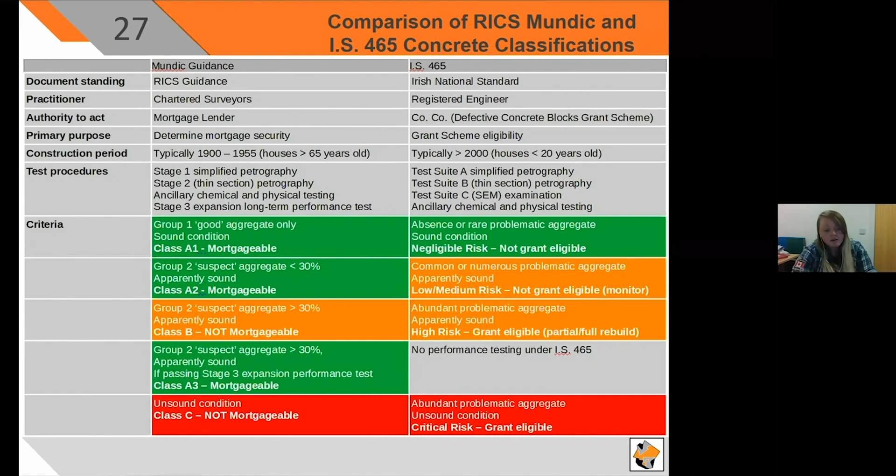So in summary, there are similar mechanisms for degradation from sulfides. The Cornish Mundic problem is very similar to some of the Irish pyrite and sulfide problems. Another emphasis on free mica as a cause for concern, not just total mica, otherwise it would completely write off all of our Cornish aggregate. And I've seen the XRD values used as free mica content, and it's not accurate for that.

The other thing is, who and what is IS 465 actually used for? If it's not eligible for the grant scheme, then what do the classifications actually mean? And finally, the potential excessive testing regimes for IS 465 compared to things like the RICS Mundic guidelines, particularly for known high risk materials.

The RICS is based on 30 years experience, and as an example, our lead mine waste always contains greater than 30% deleterious aggregate. We know it has the potential for accelerated degradation despite any structural condition it has now, and it's automatically assigned Class B because we know at the end of the day that's going to happen.

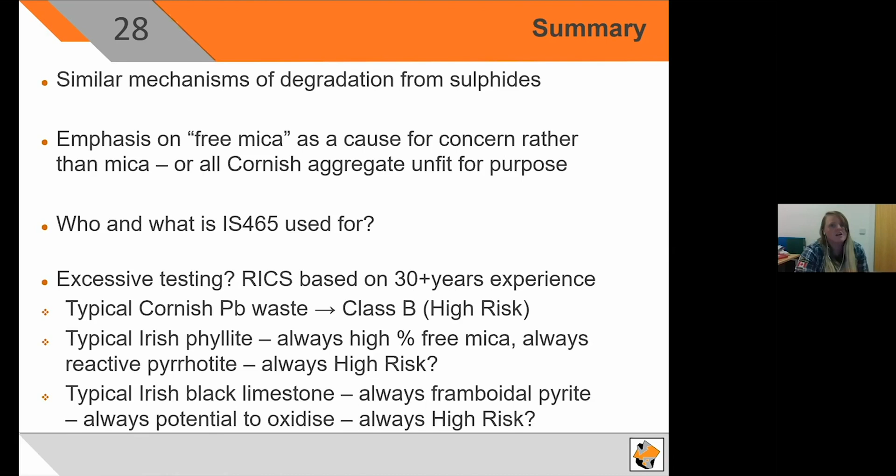So to put this in perspective, typical Donegal phyllite, always high mica, it's always got reactive pyrrhotite. Shouldn't it always be high risk? Same with the typical Mayo black limestones, always contains framboidal pyrite, therefore always has the potential to oxidize, and therefore should it not always be high risk? So thank you for your time, and I look forward to answering any questions in the panel.

Okay, thank you so much. So much information, and I'm so happy this has been recorded because I'm sure many of us, homeowners, engineers and research students, will get a lot to work on this moving forward. I noticed questions have been coming in, and Aidan, you've been answering the ones particularly directed towards your presentation there. So just a few other notes I was jotting down.

Sorry, Aidan, I can't hear you there. You're not coming in. Okay, that should be working now.

Yeah, look, I don't disagree, and some people are taking my comments slightly out of context. What I wanted to say, and it has been followed up very well by Corinne and by Bradley, is that this is a complex issue. And I'd love to get that little picture, Corinne, you have of the man scratching his head, because I'll use that in further presentations. Engineers like to be very clear in their decisions and give definite answers. There is no definite answer here.